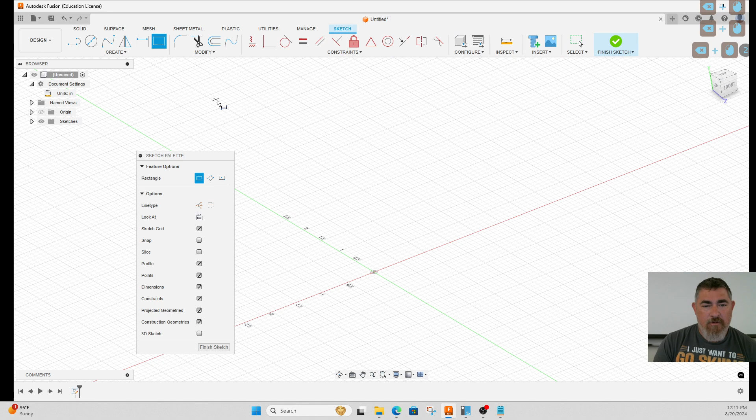So I'm going to go ahead and create a sketch, same as I've been doing, and I want to make a center rectangle. I'll make it 5 by, let's say 2, and finish that, and extrude it up 1.5 inches as a new component.

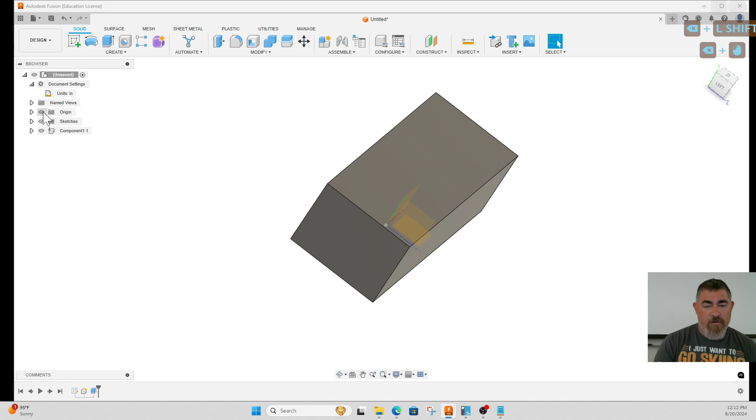There we go. So now I have this box here, and remember, we can sketch on anything that's flat. So any of our origin faces here we can sketch on. Sometimes if you have a part centered on the origin, you can't pick that, but if you zoom out, then you can grab it, or you can expand the origin here and pick on faces right there.

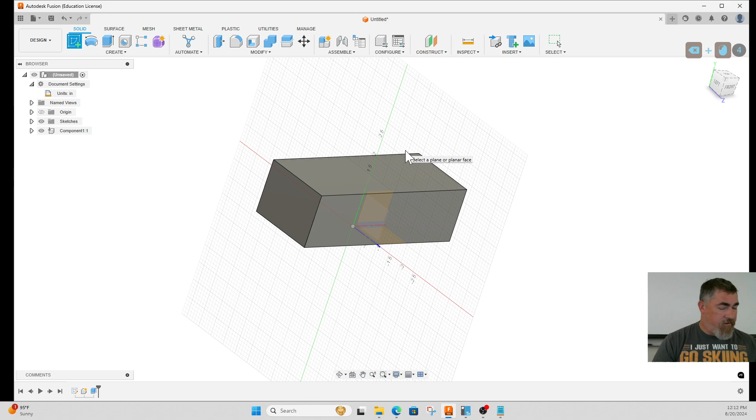So either way works if you wanted to sketch on one of those. You can also sketch just on a face. So if I just click sketch and pick a face, you can see, if I'm coming out around the part, it'll try and find the closest of the origin faces to be on. I can click on those and do that. But I can also just pick on individual faces here.

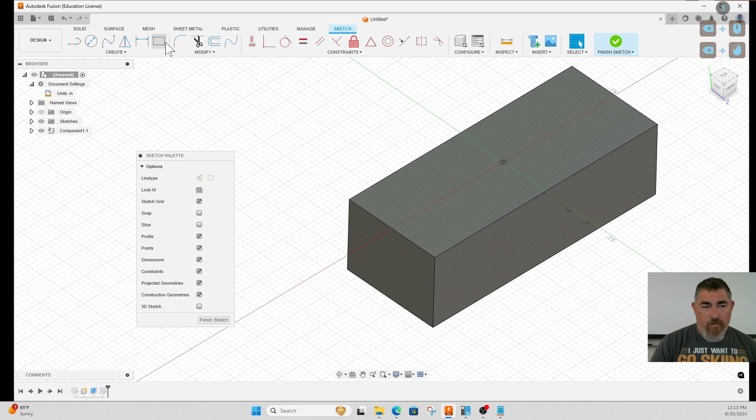So now I've sketched on there, and you can see the grid is lined up with that face that I'm sketching on. And so I can go in and do a rectangle here, and then dimension how big I want it to be, whether from there or I can tell it from here to here.

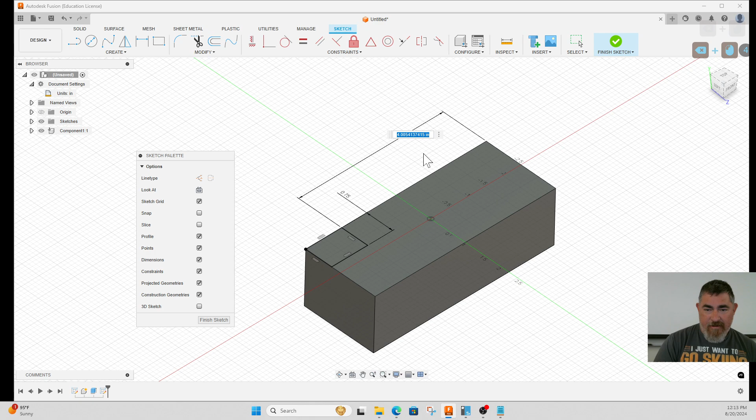So if I just want to see what I can move, right now this blue line here is what can move. So I need to dimension this way or that way, so I'm just going to go from here just so we can see how this works. So if I tell that to be 3 inches there, as I finish, I can extrude.

I can go all the way, but it doesn't know what to do yet because there are 2 closed areas in this part. If there's only 1 closed area, it's going to select it automatically. But since there's 2 closed areas, it's asking what do you want me to work with. So I'm going to tell it, use that.

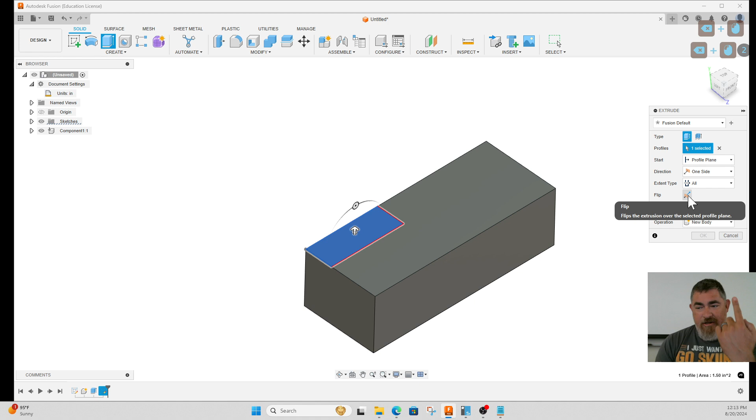I'm going to go all the way through. Right now it's trying to go up, and there's no all the way up. I'm just going to hit the flip button, flip it down, and you can see it automatically changed the operation to cut right there. And I can say OK.

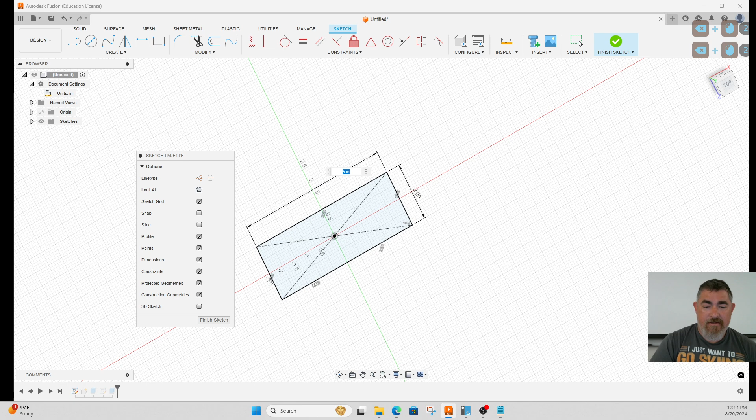So I've got this part here. If I want to make some changes to it, I can go into edit my sketch. And remember, I made that slot 3 inches from this side of the part. So if I change this to 10, and I finish the sketch, you can see that this line here still stays 3.

Because that's what I dimensioned, that's why I told it to stay the same. So this cut will always be 3/4 from here and 3 inches from there, no matter what I change on the previous series of steps.

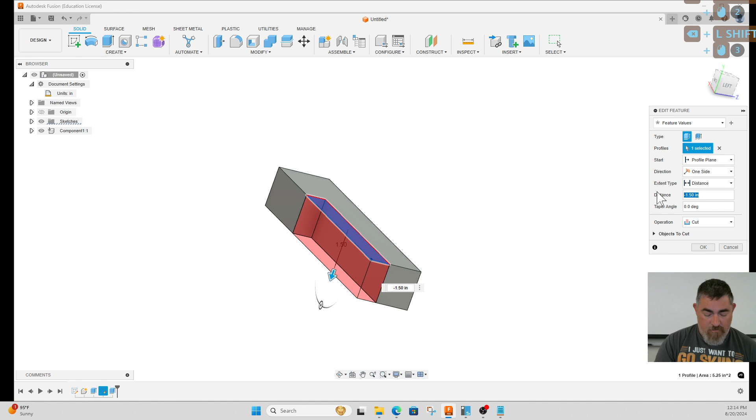I can also go back in here and tell this that I don't want to go all the way through. Maybe I only want to go down 1/2 inch. So negative is going to go into the part. If I just put a 1/2 inch, it's going to go away, but it can't go away and cut.

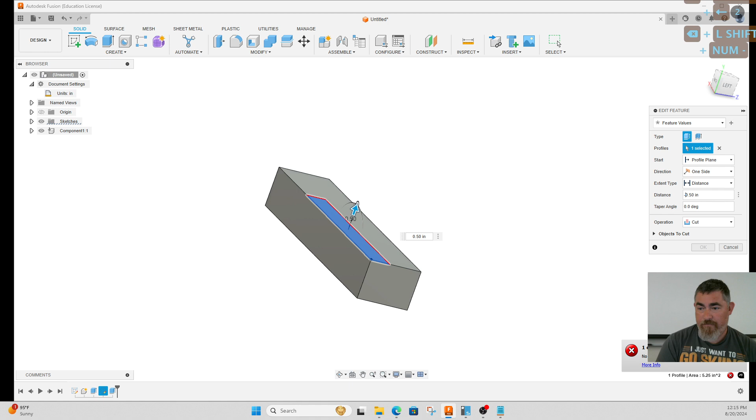I could join and add material that sticks out 1/2 inch. So positive is always going to go away from the part. Negative is going to go into the part. So if I cut, I need to make that a negative. And it's going to go into the part.

I can also tell that I don't want to just go there. I can tell I want to go to something. I want to go to this face. And it'll just automatically go to that face.

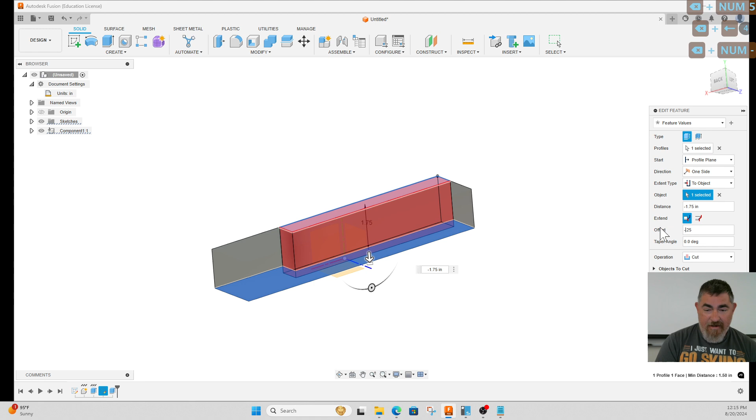That's great. But I can also put an offset and say like a 1/4 inch. I want to go into the part, so negative 1/4 inch. Now it's always going to stay and leave a 1/4 inch right there. So if I change this height of the part, it's still staying a 1/4 inch there.

So within the terminations there, I can have it change between a distance, where it's always going to be the same distance down no matter what I do, or I can have it go all the way, if it's a cut, it's just going to go all the way through no matter what I do.

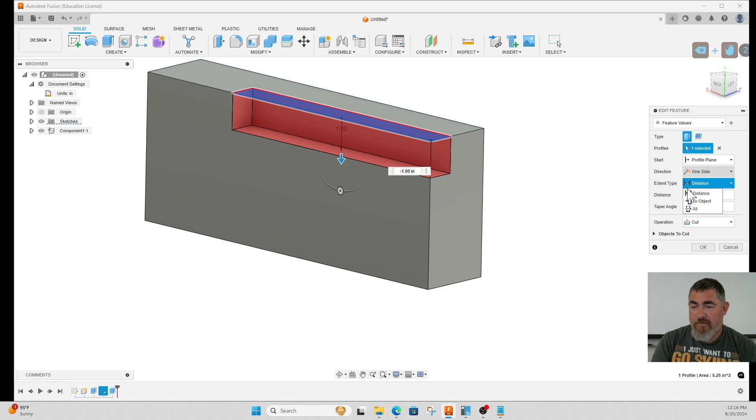Or to an object, and then I can just have it always go to that face, or to an offset from that face. So let's say I'm just going to leave this one here, just down 1 inch.

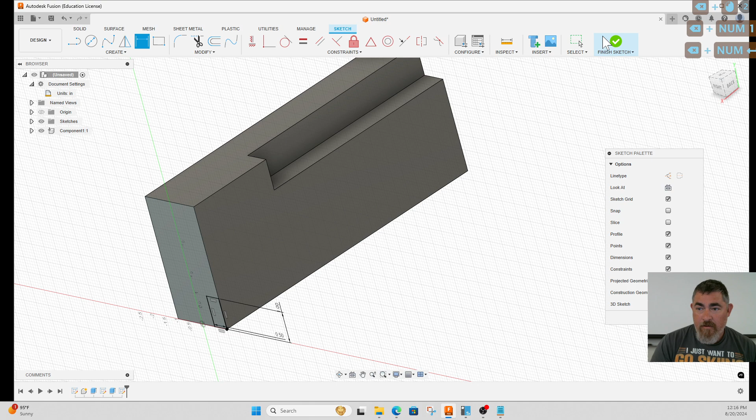And if I make a cut on this side, dimension that, I can tell this cut to go to this face. So you can see that those two are now lined up.

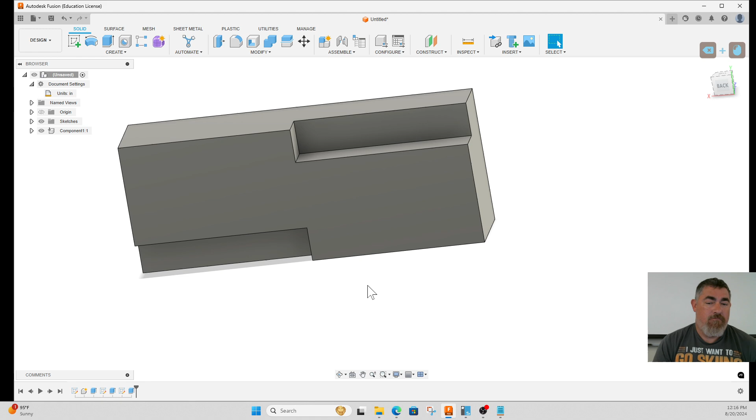And if I go back and edit this one, I tell it to be, oh no, I want that to be 5 inches away. You can see both those cuts move with it. This one changes and this one goes to be the same as where that one was.

I can also create a sketch over here, and if there's something over here that I want to use, but I can't see it on this sketch, you can see it automatically captures the edges of that face.

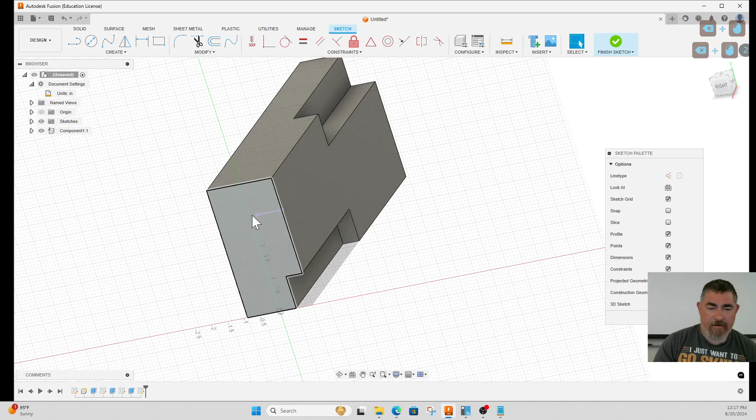But let's say I want to know where this line here is. I can go to create and project, or just type P. Now if I just pick this edge, or that edge, that'll turn into a point, because it's going to bring that forward perpendicular onto my current sketch plane. So I can just pick that line there. Now this line represents this face here.

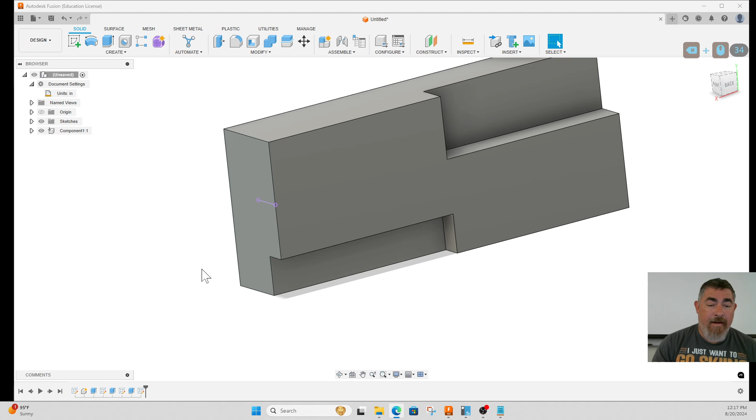If I finish that and leave it there, and then go back and edit this extrude to make it deeper, you can see that line moves down to stay lined up with that face. So I can have that kind of control of lining things up with each other. Go ahead and edit this.

So let's say I want to go ahead and make a box that's the same width as that, but it's going to stick up a little bit. So I'm going to do that and tell it to be, I don't know, 1/2 inch.

That's great, but I want that box to be in here. So when I extrude, I'm going to tell it to go negative 0.5.

So maybe I want a 1/2 inch wide box in there, but I want it to be 1 inch from this side. So for the start, instead of saying profile, just like I did at the end with doing a to-object with an offset, I can do an offset here and tell it to offset -1 inch.

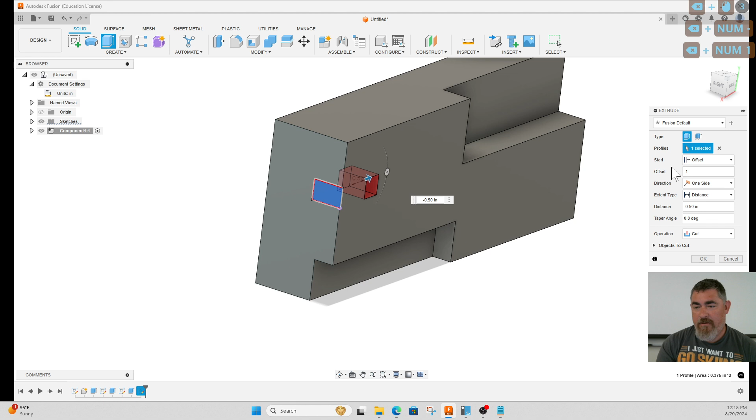So it's going to go into the part 1 inch and then have my feature. So if I measure from here to here, I get my 1 inch. And if I measure this line here, it tells me that that's the 1/2 inch line. So I can do that, so I don't have to draw exactly where I want to be making my parts.

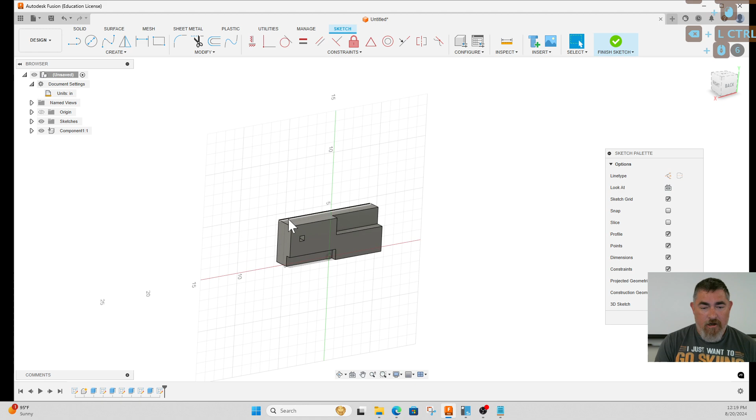I can also create a sketch, go back to this plane here. On my plane, so now you see my plane is going right down the middle of my part. So I can do that too.

Again, I want to capture this edge. I want to project, so just P, click on that edge and say OK. And now I'm going to do a rectangle from here to here, and I'll tell it

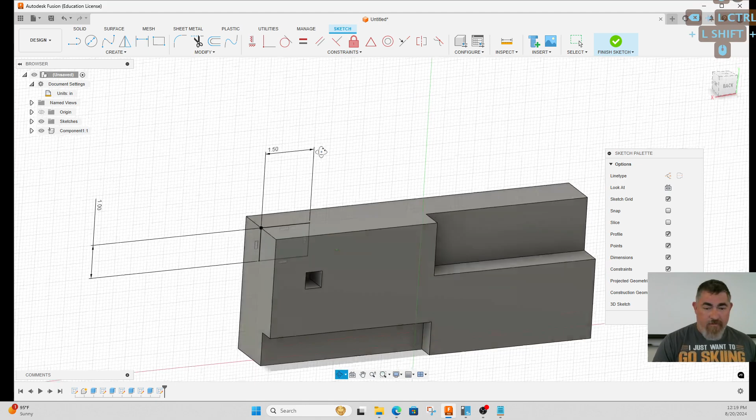to be some size. So if I'm moving around, I can see kind of where that is. If I press the slice button here, it's going to just cut off the rest of my part and let me see just where I am. So that might be a good thing to get used to using when you're doing things.

Now I can finish the sketch and extrude. And so one of the other options I have here for direction is I can do a symmetric one. So now I can make it go evenly from that plane out to the side.

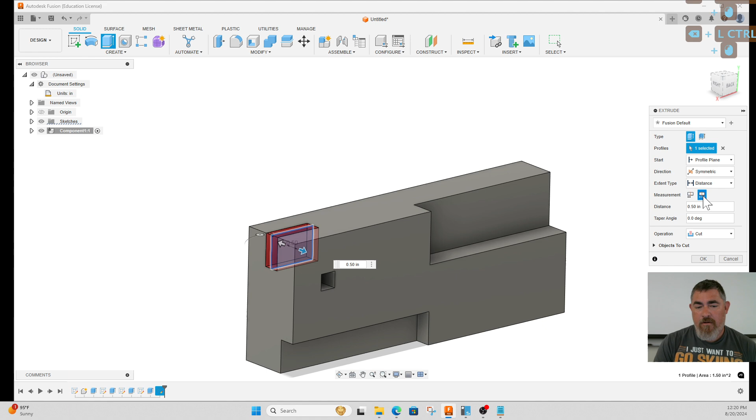I can either tell it how far I want to go just on one side, and so the overall width will be double that, or I can tell it the overall width. So I want it to be an overall width of 1 inch. So now I have that in there.

So a lot of things I can do within the extrude command by editing where it's starting, the direction, the extent of the part. So, all right, let me know if you have any questions.